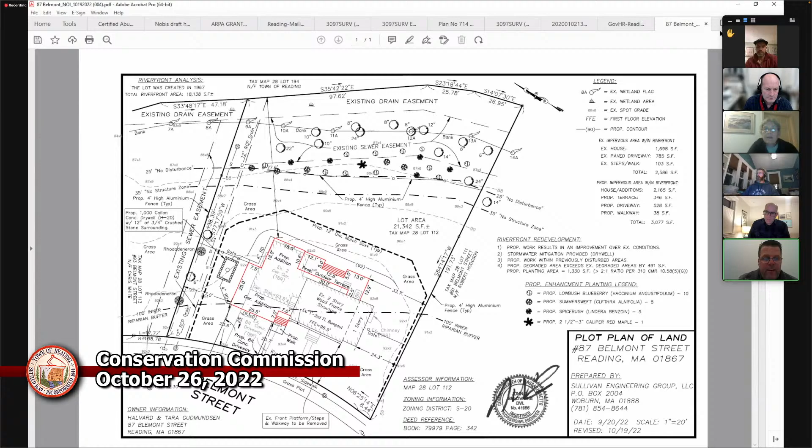At our last meeting, the commission wanted to do a site walk on the property, which I know was completed. But also what came up at the last meeting is this is a redevelopment project within the riverfront, and there were some questions on whether we meet the performance standards for redevelopment.

So what I tried to do is I provided a table on the right-hand side of the plan, halfway up, the riverfront redevelopment standards, showing: one, that the proposed work results in an improvement over existing conditions; two, stormwater mitigation was provided, we provided a dry well to capture the roof area of the addition; three, the proposed work is within a previously disturbed area; and number four, the proposed degraded area exceeds the existing degraded area by 491 square feet.

We proposed a planting area to the rear towards the brook within the 25-foot no-disturb zone of 1,330 square feet. So we provided greater than a 2-to-1 ratio of mitigation over the degraded area. So I think that shows we met the performance standards. All other elements of the plan are as we presented last time.

I'll just turn it over to the commission to see if there's questions, or if there's any questions from the site walk that took place. Is there anyone on the commission who has questions or comments? Andrew?

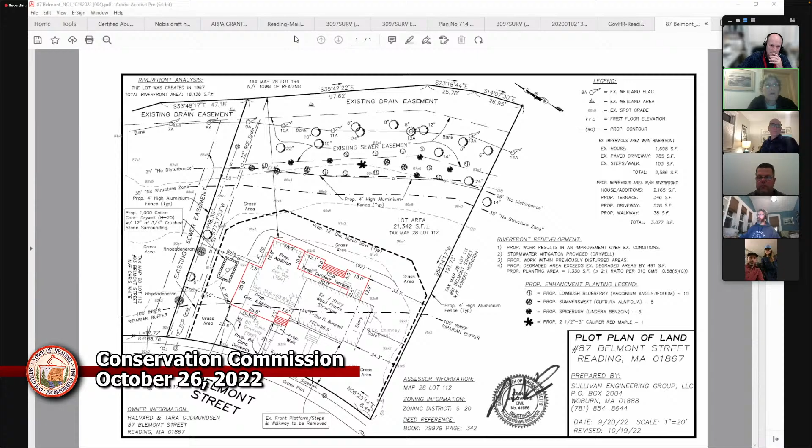Are there any members of the general public here at tonight's meeting who want a chance to comment on this project? If so, use the reactions button at the bottom of your Zoom screen and click the raise hand feature.

Seeing none, I think the next step would be a motion to close this hearing. This is Andrew, I'll move to close the hearing for 87 Belmont. This is John, I'll second. John Sullivan in favor, Andrew Driven in favor, Carl Ciccone in favor, Martha Moore in favor.

The next thing would be a motion to approve the project. Someone will make a motion, and between the motion and a vote we want to talk about conditions. We need a motion first though. This is a notice of intent, right? So I'll make a motion to approve the notice of intent for 87 Belmont with the condition that there will be, in addition to what's on the plan, invasive plant management, the possibility of a trail discussion in the future, and removal of any yard waste found along the riverfront.

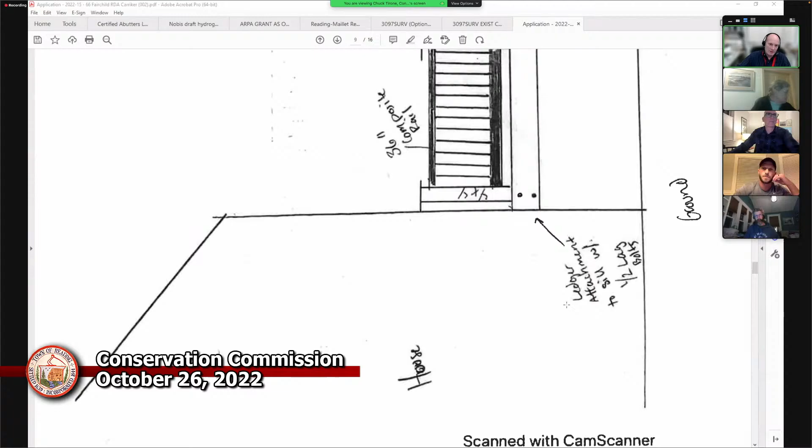Sure, so I'll put up the plans and you can describe your project. I think maybe just go through the plans quickly. Please forgive my amateur architectural drawings, but they suffice to get the permit approved through the building department.

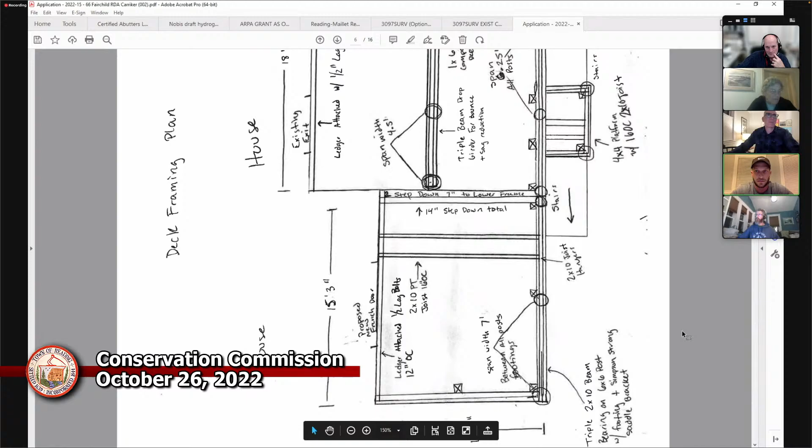So I think the best plan, Chuck, would be to put it on the physical plot plan so that we can discuss the layout, or would you like for me to discuss the current dimensions of the deck? Because that's what I'm looking at currently. Yeah, let's see if we can find the plot plan.

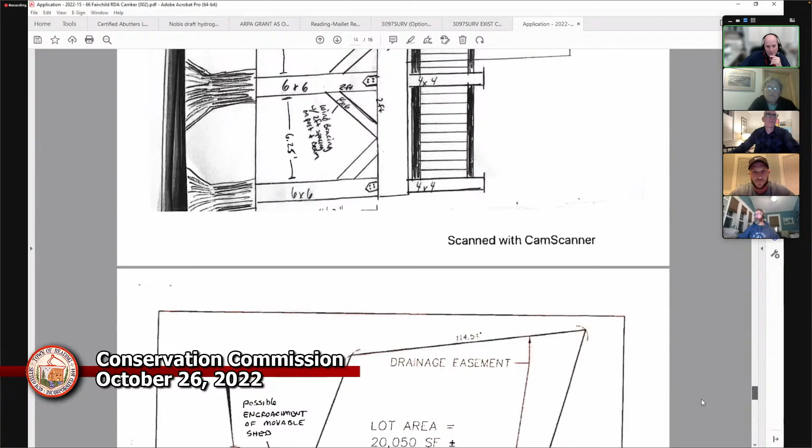Not sure if it's there. That's it, okay. So the current plot plan, as you're looking at it, I have drawn on where our access point will be from the main point on Fairchild Drive to the abutter's property, where we'll be putting a temporary road in.

Erosion control would be silt fencing throughout the property line, from the road in between the property lines of the neighbors, and then surrounding up to the easement point at the 25-foot mark at the rear of the property.

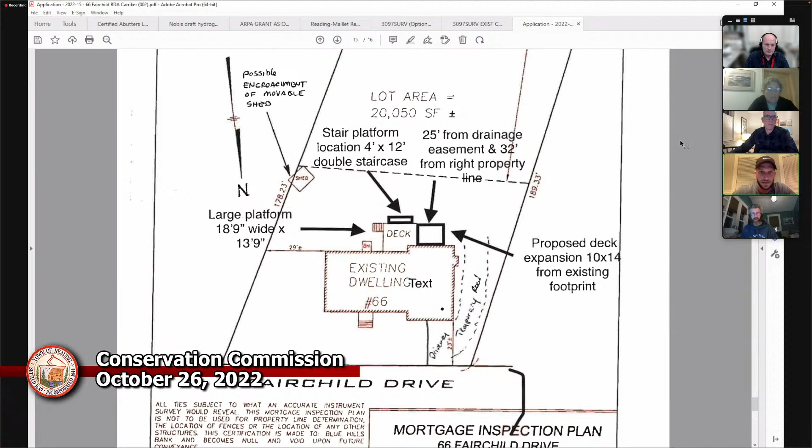I had an additional plot plan, I believe, that was added in that may have been on the next page, Chuck, that showed more detail, if I'm not mistaken. So yes, this is it, this is the current one.

So the double lines you see at the top of the page are the silt fencing. It surrounds the property. The existing deck is currently there that will be torn down, and then the new deck extension off of that, it's actually the west side of the house.

All within like 120 feet from the current point of access to the conservation land, and then 25 from the attached easement. Staging plans and details for all of our tools would be to the east side of the deck at the rear of the property, tucked close to the house and tarped over during non-working hours. A pretty basic, straightforward plan in place.

As far as the footings are concerned, the only difference on the plans from what was stated in the reading by you, Martha, is that we would potentially like to have a piece of equipment now to dig these footings for efficiency. The plan is to haul out all of the backfill that's not reused around the sonotubes, and it's not going to be that much when you're talking 13 holes, but it would speed the process up.

So that's the only current change, is that I would like to have the option to bring in a mini excavator with an auger attachment, and that's the only change on the current plan. I think that pretty much sums up the project and what we're doing there.

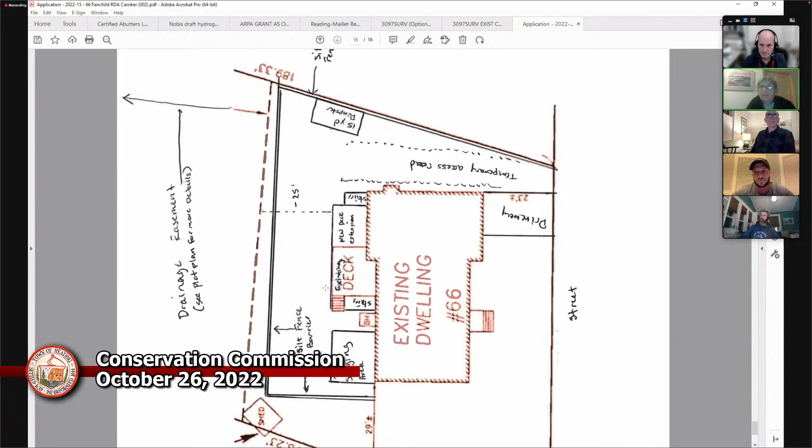Anybody else on the commission with any comments or questions? Or Chuck, do you have anything else? No, I don't. Okay, and I don't think there's any other members of the public on this call, so we don't have to ask for comments from the public.

Okay, so this is a request for determination of applicability. In order for this project to go forward, we would need a motion for a negative determination. Do we need to close it first, or can we just put the motion forward? You just put the motion forward.

All right, RDA. This is Andy. I'll make a motion for a negative determination in the RDA for 66 Fairchild Drive. This is John, I'll second. And John Sullivan is in favor.

Sure, do we want to talk about conditions? Just before we move forward, just to make sure. So mini equipment is okay, and the spoils are removed from the site, and there will be erosion control. Is there anything else the commission would like?

I mentioned having the owners aware of the buckthorn in the back corner of the property, but I don't know that that needs to be a condition. I'd be glad to bring it up to them, and if it's not too much work for my team, I will gladly help in that process. It's no big deal to us. I just need to know, first of all, what buckthorn is, and then we can help potentially eradicate it.

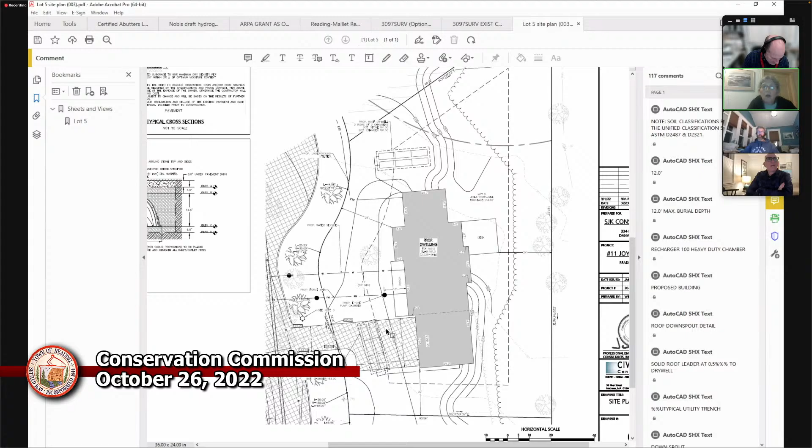Since this is really outside of our jurisdiction, there's really nothing that we need to know about or approve, we just need to give Chuck permission. Is that correct? Yes, that's what I'm asking for. Can I have a motion to authorize Chuck to sign the occupancy permit for these 2 lots? I move to authorize Chuck to sign the occupancy permits for 5 and 11 Joy Lane. Carl Saccone, second. John Sullivan in favor. Andrew Gibbon in favor. Carl Saccone in favor. And Martha Moore in favor.

Great, before we move, hey Chuck, when we do these in the future, do you have the larger plan for which these are a part of, just so I could see what's going on? Sure, if you just want it to be a rubber stamp, then we could do that. But I'm not going to remember this one. I'm going to say anybody on the commission that wants some additional material, please just email me. We do have plans in this, and I could have also got them from the developer.

So I'm assuming you want a plan that shows all 6 lots and the wetlands. Yeah, not just an overall. Yeah, especially because I think Andrew was not yet on the commission when we approved this project. This was the first one I ever got to vote on, so that was in 2020, January of 2020. Right, you would not have seen the plans previously. No, I haven't. But all's good.